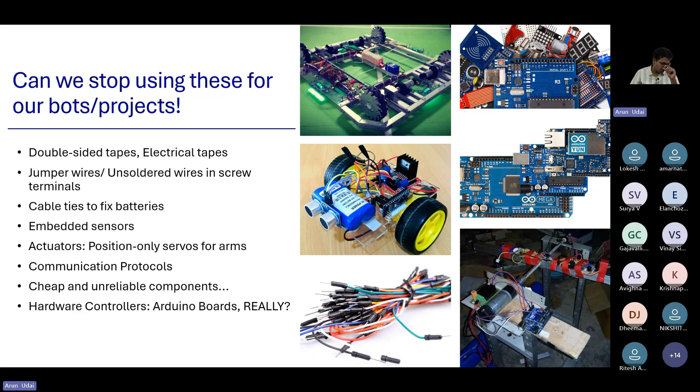Okay, hope you are listening. All of you are there. If a few of you can show me your face, it would be much better.

Okay, so where did you start basically before UG? Okay, before undergrad, where were you? Just check any nearby school-level hobby competitions and science exhibitions. You were doing it before, right? Quite a lot of you. Hobby-level science competitions and those exhibitions you all have attended, right?

So you see, even kids are making robots with, you see in the front, what kind of sensor is this? This is ultrasonic sense. Yes, very good. And then you have wheels, you have motors, right? And then you have a similar kind of maybe Arduino board or something. So that is a school kid who intends to make maybe an obstacle avoidance robot or a line follower, right? So that is very common at school level nowadays.

If you go abroad, you find Lego based line followers and kids play with that. Nearby at a science exhibition, I have been there as a judge, and I saw there is a student in India, and there are many students who do this.

So this person is doing an exoskeleton, with links connected to potentiometer joints. Each joint has a potentiometer which gives feedback of how much angle the joint has turned. So each joint gives you the feedback of joint angle, and he can do forward kinematics, or maybe using simple trigonometry he can find out where both his arms are. He transferred those values to his motherboard, which was an Arduino board, and he had a motor driver on all the joints of the biped lying here. That fellow used to replicate the motion this person was doing, and this was a school project at DAV Bokaro school, in Jharkhand, near Steel City town. So it's a DAV school, intermediate students doing it.

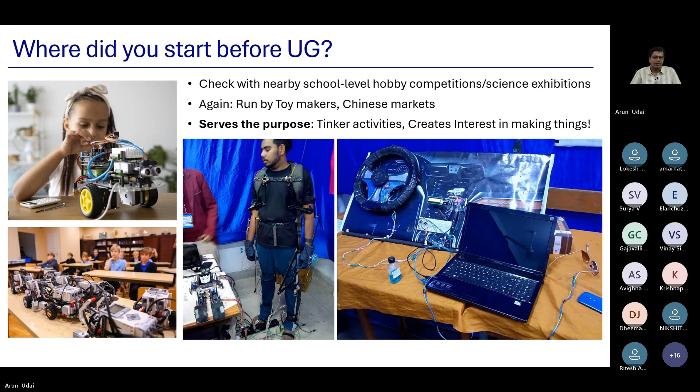So quite a lot of you may be thinking, then what will we do, what tools will we use? That is a big question. Are we still doing the same thing as long as we keep using them? Have you seen any AC, fridge, or washing machine delivered to you with an Arduino board, or maybe any of these kinds of sensors, or an electrical motor that you used at UG level? If you have come across this, please write it in the chat box, or if you have some idea, put it in the chat box, or you can stop me and say that. So that is where we started before UG, it was good till school level. Don't claim that you are still doing UG projects, definitely you are not, if at all you are doing this.

So this simple clumsy bots, where does it lead to? These are all pictures from Robocon India, organized by Doordarshan. It's the biggest national level robotics competition organized. There are similar competitions organized by Technex at IIT BHU, Techkriti, Concetto at IIT Dhanbad, Srijan, and quite a lot of other technical fests. In all of them you have probably seen these kind of bots, is it not?

Badminton playing robots, or soccer, or basketball, and problem statements are given which favor certain vendors. Actually these are all run by cheap Chinese businesses. This entire ecosystem is flawed. This is a big racket running in the background.

If this talk is going to be an eye opener for you, it ends up with your UG and PG. It should end as soon as you start your UG and PG, after winning a few intercollegiate hobby competitions or your final year projects. It ends there. In your lifelong career, if you go abroad for higher studies or to industry and start doing real projects, you will never look back to these models, and it becomes garbage for the school too.

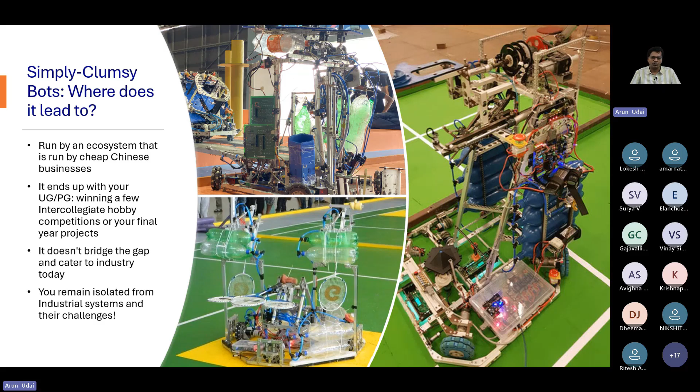You have managed to do it, okay, but you've wasted a lot of money. So what India cannot afford now is making dear robots for entertainment, fancy research just for publications that lead to citations, nothing more. Hotels using food serving robots, or any kind of Sophia also.

If you know Sophia, she was given citizenship by Saudi Arabia. She was also given a passport. It's a mockery of robotics basically. It's just a speaking robot in the background that uses some kind of AI or ChatGPT to answer queries, and they're done with that. It was just a publicity gimmick for Saudi Arabia to drive tourism, right? That is always there.

Big countries with big money will keep doing this, but don't just blindly follow them. We cannot have that fantasy with our government's money. India is not that rich, they are not spending that much money on robotics, right? You cannot afford to play guitar with a KUKA robot. KUKA robots are there at many places, even in industry and sometimes in academics, starting at around 25 lakhs.

If my student comes and says they want to play guitar with it, definitely it's not meant for that purpose. Perhaps if I had hundreds of robots I could spare a few for that. I've seen this as a UG project at IIT Delhi, when they had just two robots. This is the pathetic situation. We cannot afford to do this, India cannot afford to do this, right?

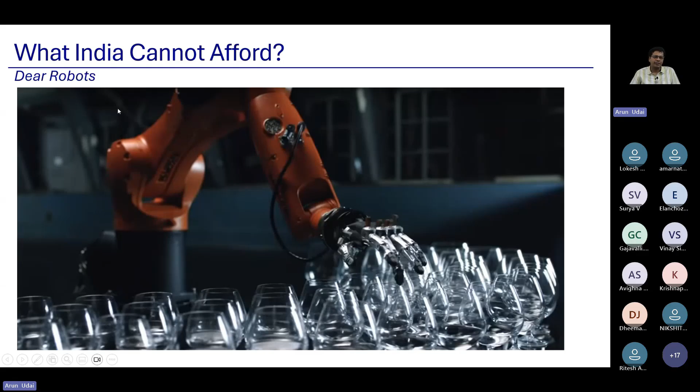That again India cannot afford. That is good for Germany. It's a German video, fine. But this was Indian, okay.

Robots are supposed to do only 4 Ds, not a fifth one: dull, dirty, dangerous and difficult tasks. A dull task is a repeatable task, like an apprentice in industry tightening bolts of a wheel all day, 8 hours a shift, maybe 2 shifts a day. Dirty may be a garbage cleaning robot replacing the human who does it. Dangerous tasks include defusing a bomb or an IED, or facing the army's location on the front. Difficult task needs a robot with high payload capacity. These are the 4 Ds we look for.

This is one instance from when I visited Bokaro steel plant. This particular video is not from there, it's from the internet since I could not record that video, but this is the exact scenario. Let me brief it now.

There is a bath of molten zinc, and this fellow is skimming the zinc bath. What's happening is a plate dips inside this zinc bath and is then raised up. It's a galvanizing plant, so a tin sheet is dipped into the bath and raised up. The surface of the tin sheet picks up small particles floating on the surface, which are oxidized zinc. So this skimming operation keeps the surface smooth.

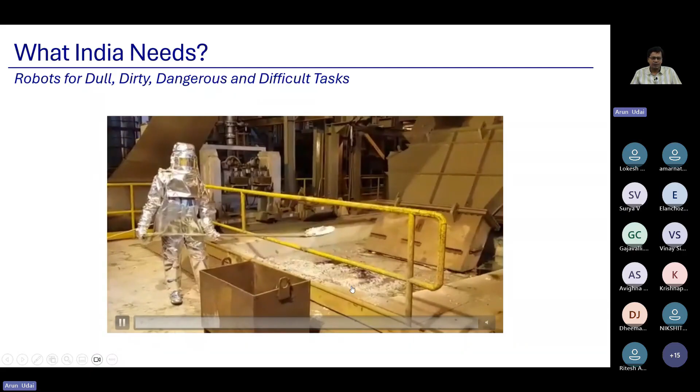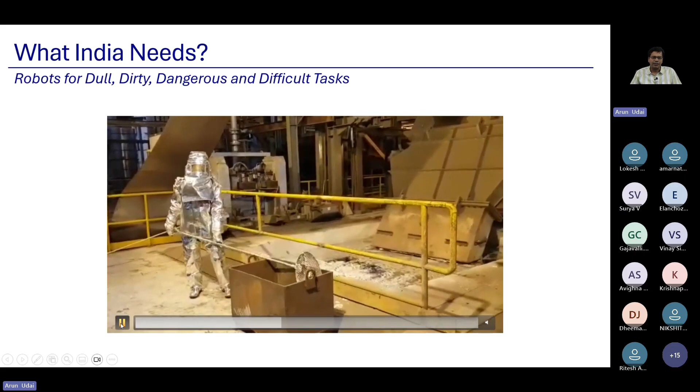You see this person wearing a fire suit. This is a very high temperature area with zinc vapor which may be carcinogenic, and he does it for only 4 hours a day, not an 8 hour shift. This is manual work happening at Bokaro steel plant, and many other steel plants do the same - it's an everyday job. This person cannot remain here for more than 6 months with a 4 hour shift every day, because he may inhale so much zinc vapor that he becomes unfit for life. That is what a dangerous task is - this is a steel plant's routine day-to-day job.

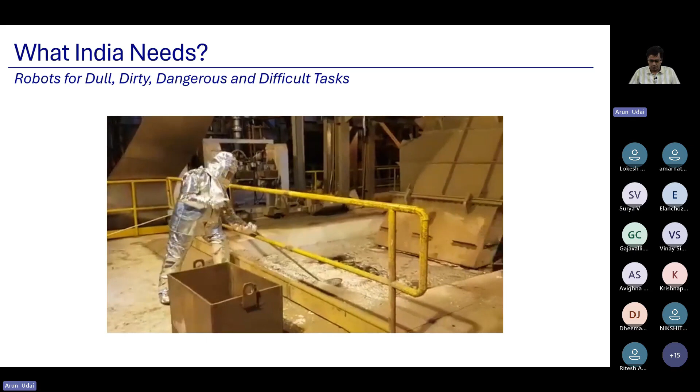The next similar job - at POSCO steel company, this same skimming operation is done by an industrial robot which safely does it. This is what human replacement is all about. When we talk about robots, they are going to replace humans, but it's not AI replacing humans. That type of human replacement was not desired, but this kind definitely is. So you have to choose where you go for human labor and where it should not be a human standing there.

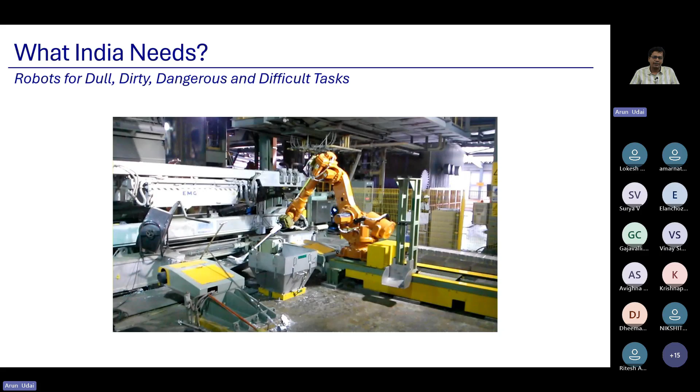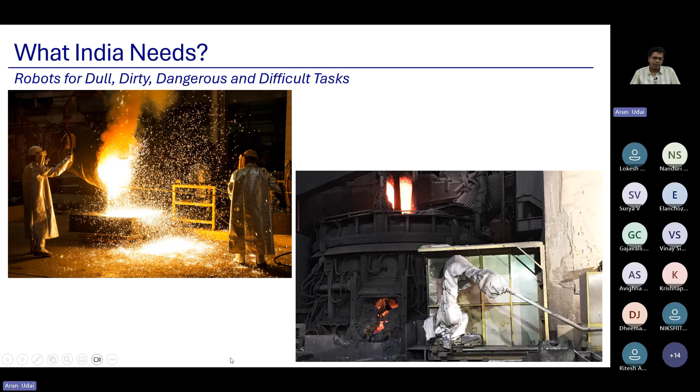Next similar job is a sampling job. While pouring a ladle, a person with a huge scoop tries to pick up a spoonful of molten steel for XRD analysis, to check the composition and purity being delivered with every ladle poured. Again there's a fire suit, huge vapor, high temperature, fumes, visibility issues - very dangerous. People stand there doing this job only 4 hours a day, which is bad. You see it done by a covered robot abroad, and also at Bokaro steel plant and other steel plants.

A similar situation is with dump trucks at mines in Dhanbad, where I'm staying - 5 kilometers from IIT Dhanbad you'll find these kinds of trucks. We're happy to have these huge Komatsu or Caterpillar trucks - a normal truck standing next to them shows how big they are. These are run by humans, with drivers trained here, so too much risk is involved. Caterpillar came up with a cockpit-style trainer for training these drivers, so they aren't put on real trucks to train.

These are training stations, robotic stations where people are trained how to drive such trucks. In Japan, Komatsu is the company that has automated this thoroughly. You don't see a driver seat here. Before autonomous cars saw the day, this type of truck had already seen use at Japan, Australia mines, and now China. These are humanless, remotely operated, autonomous driving haulage trucks, already in place.

So this is the situation, and what India is doing - we are busy making fun out of entertainment, robotics funding, research paper publication and all. I don't say you should stop doing it, but robots are not meant to do that in India. What India needs is robots for dull, dirty, dangerous and difficult tasks.

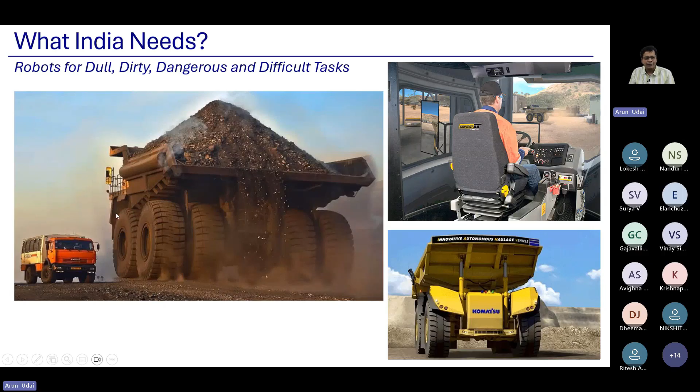So these are a few applications of what India needs, not an exhaustive list though. Diwali is coming, you will see Roomba cleaning and mopping your floor for just 11,000. So how did this all happen? Somebody invested huge amounts of research, money, and time, and then it came up. We need to invest there too - this is the thing that we intend to do.

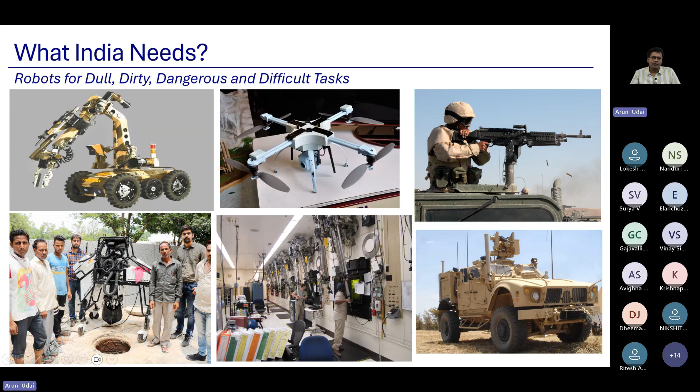So this is the screw terminal, where you can plug in these wires easily, and they are very reliable. You can hang almost 5 kg with a simple wire, and it won't come out, it won't break. They are reliable copper wires, not like your jumper wires.

It is also possible to buy wires around 1 square mm, and there are thimbles for that as well. Wires can be lighter too, and this is available online at various shops. You may buy this and use it from now on.

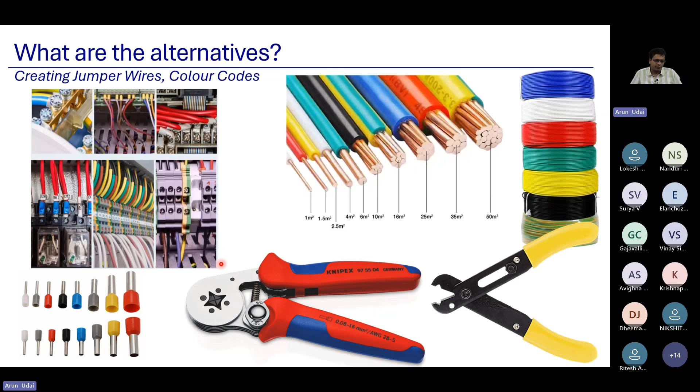So remove those 5 things that I mentioned initially from your life forever. If it is your lab, take it out of your lab. Don't let it in.

PCB holders - don't use double-sided tapes anymore. Maybe you can use DIN rail adapters, DIN rails. Behind you, there is a sheet known as DIN rails, on which you can mount PCBs, and it is the industry standard.

And PCB holders like this, small plastic thing, sometimes you can get it 3D printed. 3D printers are there nowadays.

You have PCB stands where you can put your boards, and the top red bordered one is a product of my company only, which allows putting in your standard Arduino board, plug it in and use these screw terminals and these kinds of wires directly tightened to these screw terminals. That makes it a very reliable connection.

It should not use any jumper wire from now on, and then it can be mounted on a DIN rail also. So this is a DIN rail mount with screw terminal adapter for Arduino boards, supporting Arduino Due and Arduino Mega 2560.

So this is Arduino that you are already familiar with, you want to use it, you can use it with this kind of adapter board. There are many, I have shown some pictures here. This could be the approach to fix your boards, not using double-sided tape.

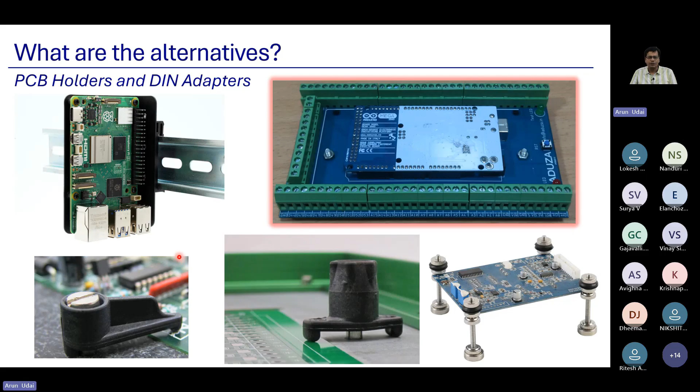Next comes the DIN rail. So this is what a DIN rail is. Again, behind this rail, this laser pointer is showing - it is 35 mm width and 7.5 mm height.

It is a DIN rail where you can mount different boxes which are available modular in the industry - modular boxes which are there in the industry. Even this supports mounting on the DIN rail.

And these are terminal boxes, screw terminals, which are available one by one, all different colors available to color code your wires. These are connectors, lever connectors. There are relays also, which may be mounted on these kinds of DIN rails.

So you see wire in, wire out. These are easy connectors with quick coupling so you don't need to solder it. Again, you can have wires with thimbles which can be easily put there. You have shorting connections, the one which is here, which can get into all these holes, and you can tighten them up so that wires are shorted.

You want to create a bank of plus 5 volts, you can create that. You can create a bank of ground, bank of negative connection - all these are possible using these kinds of shorting connections, which are industry standard. All these are industrial standards, so try using these in your projects.

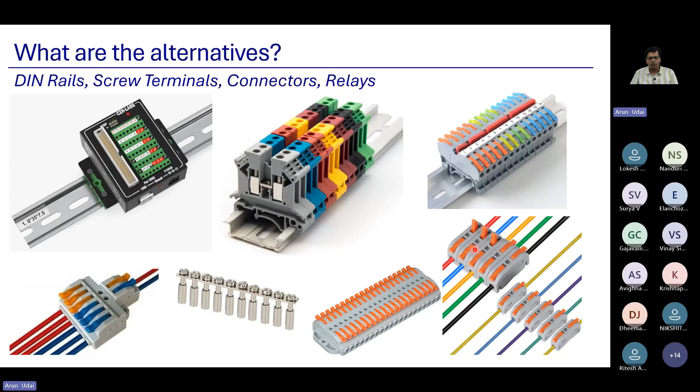Don't try to solder them with just sellotape or something like that, not even engineering electrical tape. So this is how you have to create your own DIN rails, screw terminals, connectors, and put your relays and everything. Next comes stacking up your wire.

So you already probably know spiral wraps. How many of you have used spiral wraps?

It clubs all the wires together using a spiral plastic tape kind of thing, and you can bring out wire from in between and it can keep all your wires stacked up. You can have conduits, a huge conduit which can carry a huge amount of wires also, right?

All the wires need to be tagged and labeled so you don't get lost if you've left your project at some point. The next intern may pick up your project from further onwards if the wires are tagged. Just the way we tag our source code in software, the same way electrical wirings are tagged.

You use cable ties to tag it further, and shrinkable tapes, these are known as shrink tapes. So all the names are here, you can just google around and see videos of that. Cable conduits, cable ties, this is cable gland.

You know how to take out wire from your hobby projects. Those were known as tiffin boxes. Now cheaper than tiffin boxes, you can buy electrical boxes which are equally expensive.

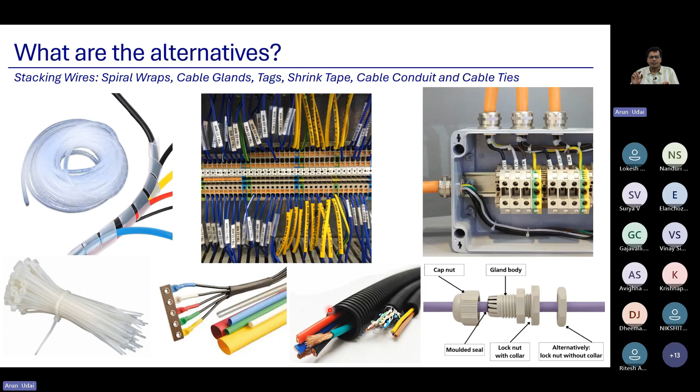So these are a few professional things which you should look for when you make your hobby projects also. You have to create discipline now - if I do it, I'll do it this way, or else I won't do it at all. I don't want to make a toy, I want to make products finally, right? So my project should look like a product. That is the first thing.

So now, how does the industrial system look like actually? What are the things that go behind? GPUs, CPUs, they look like this. They are ruggedized PCs. Sometimes they can carry as much as 200 kg on top of it. They are vibration free, sometimes ingress protected, sometimes dust protected.

Noise free, and it can work reliably for almost 4 to 5 years guarantee they give, and it lasts for almost 15 years or so. That is how they are made, these are ruggedized industrial PCs. Configuration could be the same or similar, sometimes even much lower, but it doesn't matter as long as they are ruggedized. It serves the purpose, I'll tell you how later.

These are servo drives, just the way you are using your H-bridge drivers, it is very much similar. It is industrial servo drives which run all these servo motors. Industry normally works on servo motors - they are nothing but motors with feedback which allows closed loop to operate. So servo motor, servo means nothing but a feedback operated motor. It can be a stepper motor, DC motor, BLDC motor, or an induction motor also.

You have variable frequency drive, H-bridge drive, or many other kinds of drives. So all these are there - this is a drive, these are motors. Probably you might have seen it on any industrial robot.

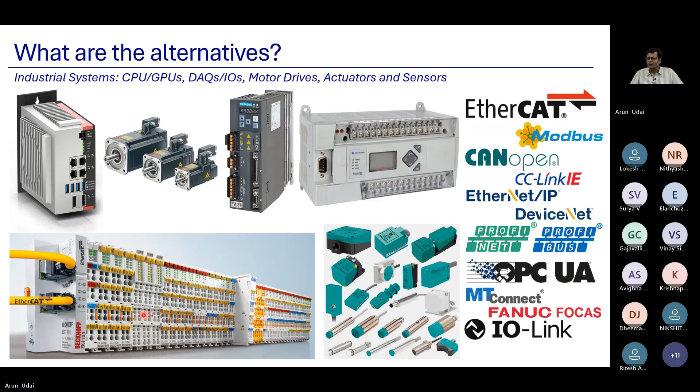So take this oath and you do it. Okay, so this is how typical industrial systems are rigged up.

You have IPC, you have HMI - human machine interface, or a display device with a touch screen maybe, which runs a SCADA input and output, which is nothing but a GUI in common terms, with a display with a touch screen and GUI. That's HMI. You have industrial PC, just like our PC - it also runs with the UPS for safe shutdown. It communicates with the coupler to rest of the boards. Boards can be IO devices, can be filter, input, output, analog, digital, or a motor driver as shown here. This is H-bridge driver EL7411. So this is a typical layout of an actuator control system or a data acquisition system.

Until unless you do this - so if at all you are setting up your lab, try to get these materials. Robotics is a costly business, we are already spending a lot on fancy projects, so rather invest on these. They are not expensive - these IO cards as compared to NI data acquisition devices are 1/5th the cost, and can work much better with open source. This Beckhoff EK1100 costs around 9,000 to 10,000. If you take a similar EtherCAT card, not even EtherCAT, Ethernet or a USB based data acquisition system, it will cost you more than 50,000 nowadays for the most inexpensive one. And that is what we are using in academics.

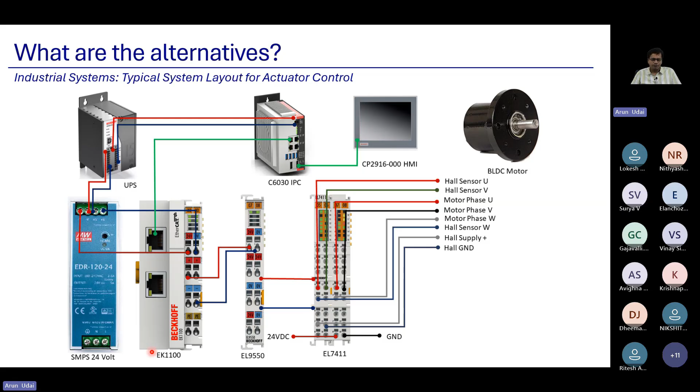You think industry is running with actuators that you use, with systems that you use, with data acquisition systems that you are using, that you are trained on. No. They cannot afford to. Academics are rich. So now, hope you know this now. Yes, that is the difference between the academic system and the industrial system. This is a brief eye-opener comparison.

If we talk about workstation, desktop PC, we don't talk below workstation nowadays, as if we are going to play a video game. Definitely we can do both on a workstation, but industry runs on ruggedized industrial PC or customized embedded systems. We don't want any workstation PC to make our robot. After it is designed, you don't need it anymore. Even to design, maybe a 1080 NVIDIA RTX should be good enough.

So don't ask for 4090 NVIDIA RTX, an i7 or i9 PC with 64 GB RAM. I know quite a lot of you don't agree with this, but ruggedized industrial PCs are still running on Atom controllers, Celeron controllers, Pentium controllers, Pentium 1, 2, 3, and still it is on. Industry has not left it.

Still i386 systems, and sometimes Intel i5 chips are quite common. Highest PC you'll see in industry will be i5, because they run dedicated systems with closed loop, fully under control. They are not operating on Windows OS. They have some proprietary operating system or Windows IoT version, not Windows 11 or 10. They work with real-time OS, VxWorks layer, like Keil RTX, LynxOS, embOS. These are some real-time operating systems which ensure your timestamps while running your systems.

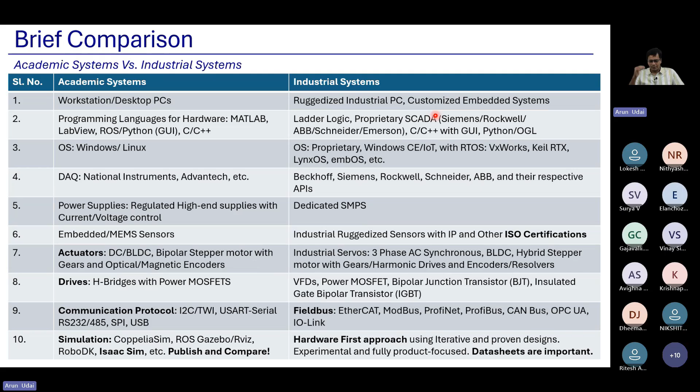So that is where the gap is. We are still at the school level. We want to pass out with the same skill set. We are lazy now, right? So that is what - so what is Isaac Sim?

They claim without ISAAC Sim you cannot make a quadruped robot. They provide a minimum specification of AMD Ryzen 5 or Intel Core i7, 7th Gen minimum, 4 cores, 32 GB RAM, normally much more than what we normally have at home.

I have 16 GB and I am doing quite a lot of stuff, but they tell you no, you have to start with 32 GB RAM, 50 GB SSD, GeForce RTX 4080 - you should start with that. I have not even started with that level. I am making products with 16 GB video RAM, VRAM. This is the minimum they claim, good is more, and ideal you cannot even think of.

The system itself will cost you something around 4.25 to 5 lakhs to get this system. You cannot even start - so it is for whose benefit? You must have got the answer: it is all marketing gimmick. They have to sell their NVIDIA Pro card, is it not?

That RTX Pro 6000 is very poorly documented, same with 5080, 4080. They are sometimes not supported by other ecosystems like SolidWorks or ANSYS. ANSYS won't support GeForce RTX 4080 to do model simulations. So if you take a card for this, it doesn't work for some other software, so why does it exist at all?

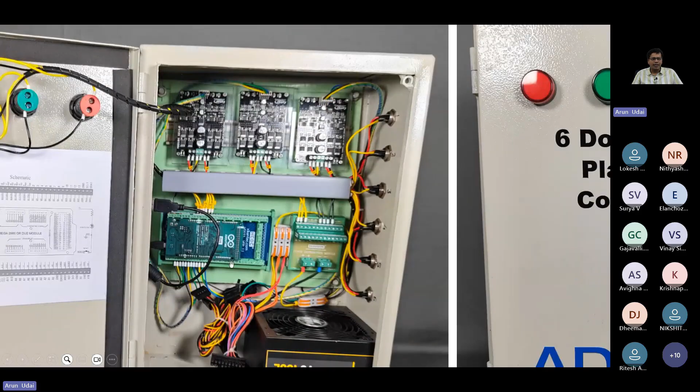If you can see this, it has Cytron DC motor drivers fitted on acrylic, bolted to them and fitted on DIN rails which you can see over here. These are three Cytron DC motor drivers, each one can run two motors. These are cable ducts which pass my wire from inside the cabinet to outside.

This is my Arduino Due board held on a DIN rail holder with screw terminals. All the wires have thimbles, tightened on screw terminals. You have a power bank, standard SMPS - gaming SMPS is quite good. I have used that to generate 3.3 volt, 5 volt, 12 volt, minus 12 volt. All voltage levels are available in this SMPS.

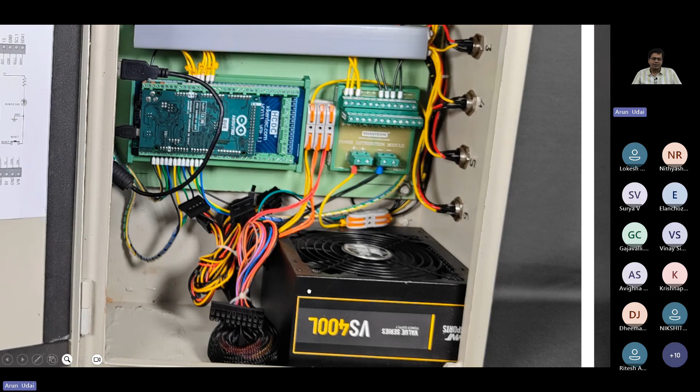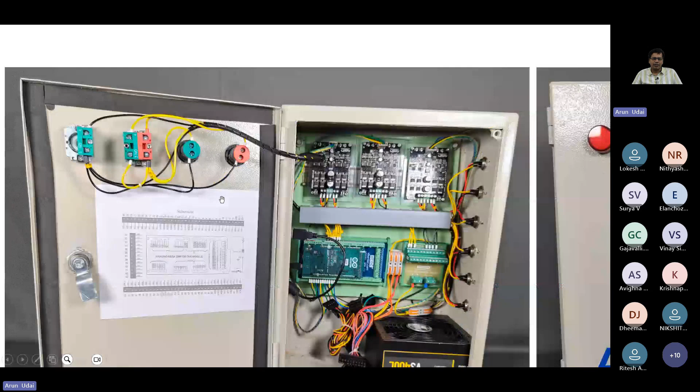So these are Cytron motor drivers and Arduino, this is a standard Arduino board. This is how we made a 6-DOF controller for one of our robots delivered to IIT Jodhpur. These are industry grade switch, NO/NC contactor elements, fitted at the board top.

So these are the switches, this is how it looks from outside. This is our 6 degree of freedom Stewart platform bot, which is water jet cut, milled, welded, CNC hold, painted with powder painting. The ADUZA logo was fixed and it was running, looked like a product.

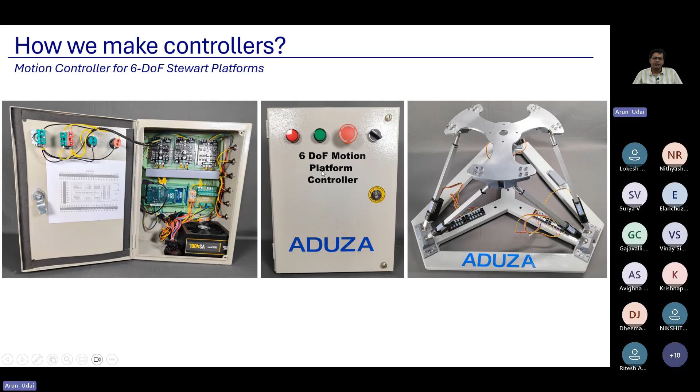And mind it, I have used the tools that I have talked about so far, and this is my product. This is almost around 50 kg payload, but they were needing not more than 15 kg and it could handle that very well.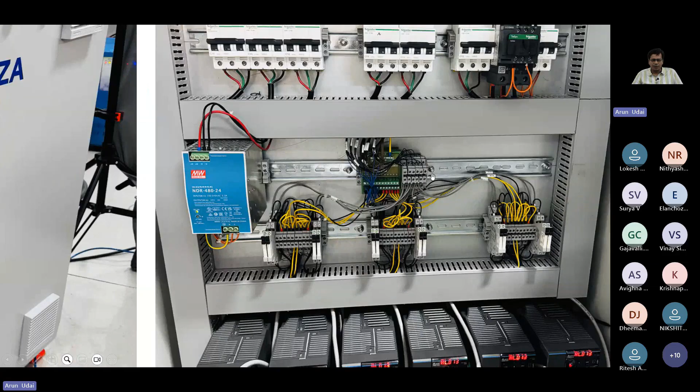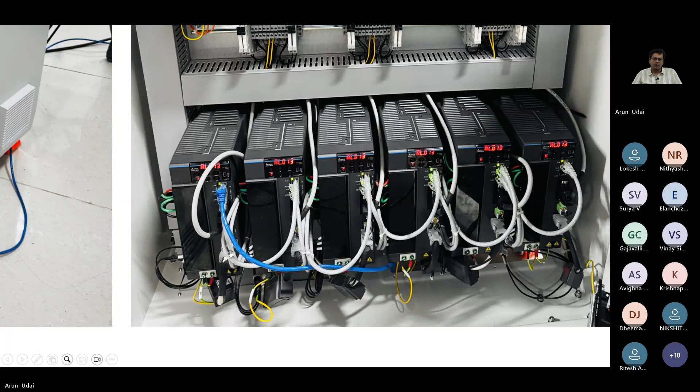Next one we made for IIT Madras. This uses industry grade components - again DIN rail, terminal boxes, MCBs, magnetic contactors. You have relays sitting on the DIN rail, and this is SMPS 24 volt supply. These are 6 servo motor drives, VFDs basically, variable frequency drives for my AC synchronous motor.

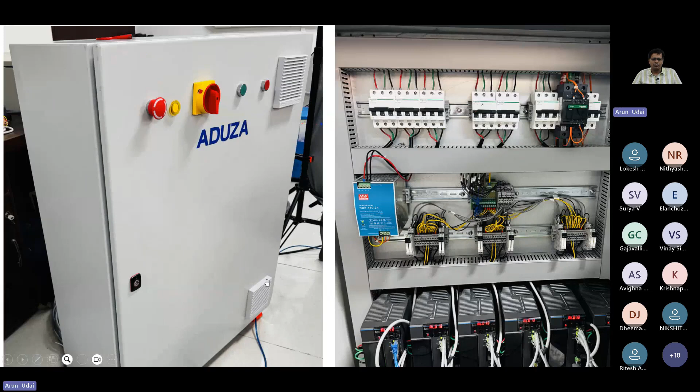And these are all the switches you can see outside: emergency stop switch, push button switches, knob switches are there, fan vents are there for the fan, and finally it again looks like this.

You see, this is tall standing like this. You have all the motors here. These are industrial servo motors with encoders fitted here. Linear actuators, fully customized, made in India from Genetics. This was again custom made.

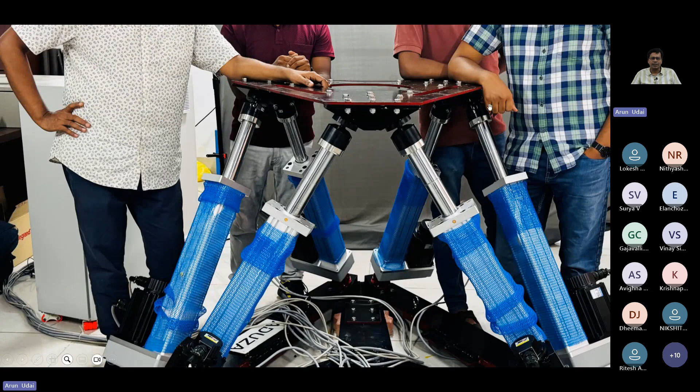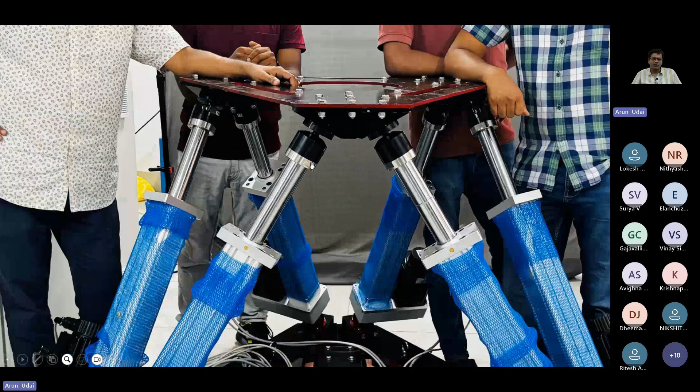All the plates are water jet cut and holes were done by CNCs. The top plate is again a single plate, water jet cut. These pillow blocks are all CNC milling done on that, right? And then you have a gimbal, that is a spherical joint on the top, linear joint here, and that is how it was made.

Got it? So this is how we made our product here. So you can make products with industrial-level tool sets only, not with any Arduino or those kinds of wiring, those kinds of tools, those kinds of relays.

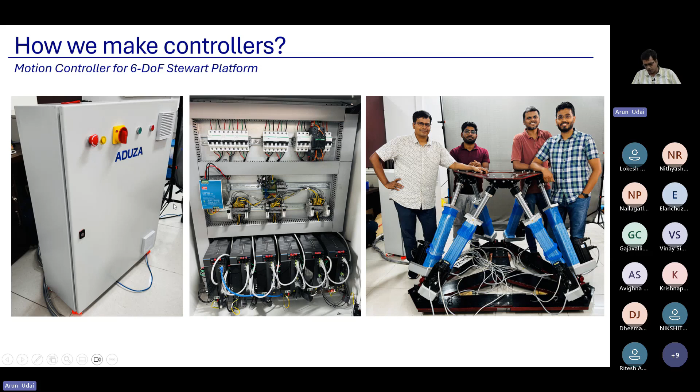So I started making things long back. I had a habit of making things with industrial systems. That is what has led me here. If you are aspiring to make your own company that makes such things, not just robots, right, even to make a fridge, AC, washing machine or any home appliance, you will require these skill sets.

So with these words, I think this is the online course for beginners where you can start. This is an ongoing course now. Quite a lot of you have already taken it. Theory for implementation, 3000 students have enrolled. The first 2-3 modules are on actuators, sensors, mechatronic approach, how to make a robot, and then I have covered installation and commissioning of robots. These things are not covered in many other courses. That is the beauty of this course. Those who are doing it, good.

Otherwise, this course is already available on my YouTube channel as a playlist. I have made all the videos available. You can watch it, right? It is the AICTE approved faculty development program course also, FDP course. Even teachers can do it. So this is ongoing for those who have missed it.

Next semester, this is coming up: collaborative robots, theory and practice. Normally it starts during February. This is last year's one. Again, it's an FDP course, this one for collaborative robots. You can take this up next, maybe register in January and get to know these things in detail, right? So tomorrow I have another talk.

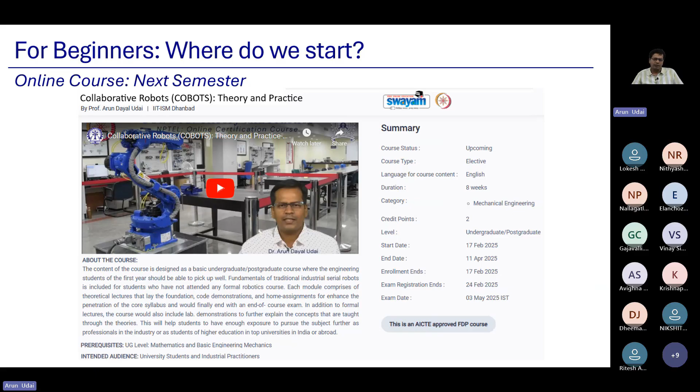Don't say 'hey, bring that screwdriver, do this, do that' - you have to talk properly. Say, give me a Phillips screwdriver of so much size, or an open-ended spanner, or a ring spanner. Name different spanners, name the tools. See and look like an engineer.

Engineers know what to look for in a machine. They don't need to take a photograph of the machine. If they have seen it, the copyright has gone - you have to be that thorough in what you observe in any machine. You have visited a place, you see what you have to see.

Look like an engineer. Don't wear slippers or half pants in your classroom, right? Look like an engineer. You have to wear a helmet, you have to wear a belt, right? You may have to wear a headset, a light also if you are in mining, right? So look like an engineer.

Your project should look like a product. Don't get limited by your stream or branch. You are a scientist first, right? You were a scientist first - when you took intermediate science, you were a scientist. Now you are limiting yourself saying I am mechanical, I need not learn maybe microcontrollers or something. You are not learning it, you are just using it - you are not there to make it, right? So you don't need any electrical engineering degree for that. You have to use it the way you use your computer or anything. Wiring is nothing, soldering is as good as welding or brazing, right? Mechanical engineers can do it.